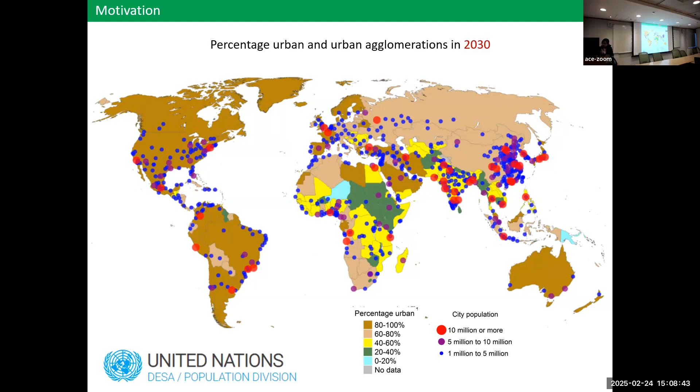During the rapid urbanization processes, there will be a lot of urban environmental problems. For instance, the urban heat island effect, meaning that the urban temperature is usually warmer than the rural temperature by several degrees. The second problem is air pollution, which usually occurs in cities with a lot of anthropogenic emissions, and also during rapid urbanization, the wind speed in cities has become lower, so the pollution removal ability has also been reduced in cities.

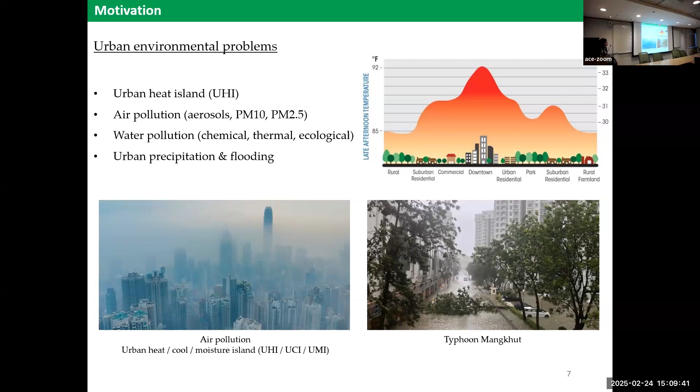The third problem is water pollution, and the fourth problem is urban precipitation and flooding, or we can also say the urban rainfall island, if you have ever heard about it. The urban rainfall island is sometimes initiated by the urban heat island, because the urban heat island makes the urban surface hotter, which gives the air more energy to initiate convective precipitation.

In contrast to rural areas, urban areas have unique characteristics. For instance, buildings tend to be denser and taller. Secondly, there is a lack of vegetation in cities. And thirdly, of course, there are more and more anthropogenic emissions of heat, moisture and carbon.

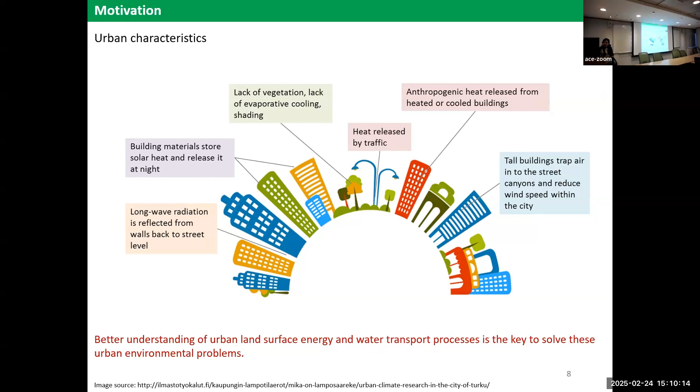So a better understanding of the urban land surface energy and water transport processes is the key to solving these urban environmental problems. Since the urban land surface is the lower boundary condition of the overlying atmosphere, any changes in the urban land surface will affect the overlying atmospheric dynamics and will further affect the local, regional, and even global climate. And since cities cluster a lot of population, that will enhance the vulnerability of urban residents to future global climate change and environmental changes.

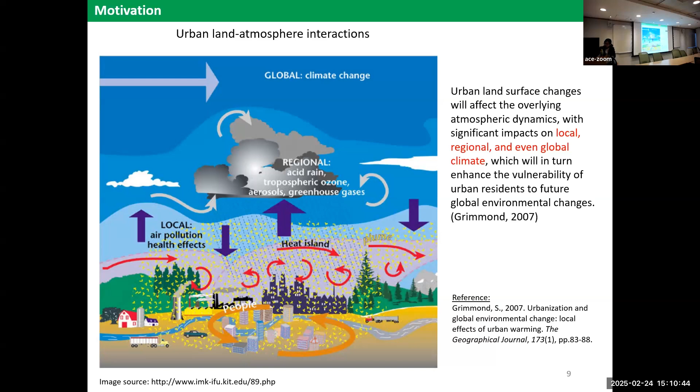To solve this problem, first of all, we need to know more about the physics. For the urban land atmosphere interactions, the governing equation is the urban surface energy balance equation, as you can see in the first line. The left-hand side is the available energy: Rn is the net radiation, HF is the anthropogenic flux, and the summation of these 2 terms is the available energy. The available energy will be partitioned into 3 terms: H, the sensible heat flux, LE, the latent heat flux, and G, the conductive heat flux.

To understand the urban surface energy and water transport processes better, we not only consider this governing equation, we need to consider more characteristics of urban areas, for instance, the urban geometry. In cities, we need to consider 3D geometry. So phase one is that our team has been doing continuous development of a model called the urban canopy model.

So phase one is just considering energy balance. The second phase considers both energy and water balance, so we consider vegetation, like grasses and trees, and also green roofs in our model. And in phase three, we consider the moisture sources with more accuracy. For instance, we will consider building emission of moisture.

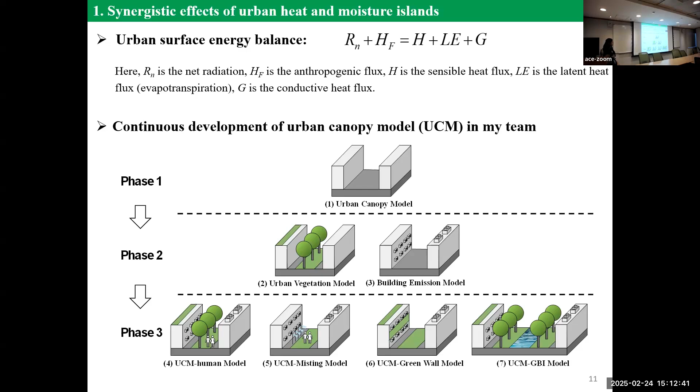And now let's take a look at an interesting phenomenon in Hong Kong. Everyone knows urban heat island. We know that temperatures have been rising, but how about moisture? How about humidity? Have you ever thought about whether urban moisture is decreasing or increasing? The answer to this question could be different for different cities. You may say that in cities there is less vegetation, so maybe drier. However, in Hong Kong, we witness a long-term increasing trend of urban moisture.

So these two figures, the left-hand side shows you the long-term trend of temperature, the right-hand side shows the long-term trend of moisture. The black line is the urban station, and the blue and red lines show the suburban and rural conditions. You can see that urban temperature is usually higher than rural, and urban absolute humidity is always higher than the rural areas. And this is actually the motivation for my first RGC fund.

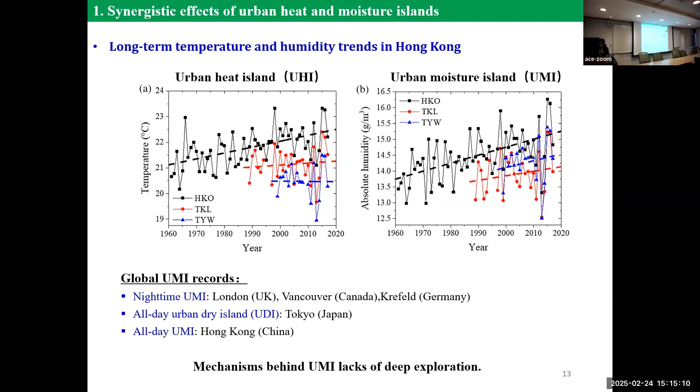So the global UMI records show that, for example, in London, Vancouver, and Krefeld, we witnessed nighttime UMI. In Tokyo, Japan, we witnessed an all-day dry island effect. However, in Hong Kong, we witnessed an all-day UMI effect. So we would like to know why. The mechanism behind UMI lacks deep exploration. And so we developed this UCM model trying to figure out the moisture mechanism behind it.

So this dynamic building-tree-air interaction has been considered in the latest phase of our UCM. First of all, we developed a new building emission model. Usually, when we are talking about building emission, most of us talk about the sensible heat or heat emission, but we don't mention moisture emission. So here we divide the emission into sensible and latent heat parts.

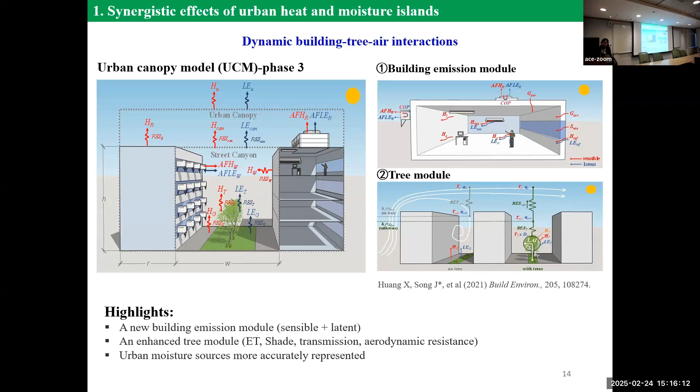And secondly, we introduce an enhanced tree module, so we can consider the evapotranspiration effect, shading effect, transmission effect, and aerodynamic resistance effect more realistically. By introducing these two new modules, this urban canopy model can resolve urban moisture with more accuracy. And this model has been tested at two stations in Hong Kong. The first one is SSP, Sham Shui Po, and the second one is HKO, the Hong Kong Observatory.

And in our comparison of model simulation against measurement, they show very good results, and the accuracy of H and LE has been improved by 40 to 60%, especially for the latent heat part, compared to other urban surface models.

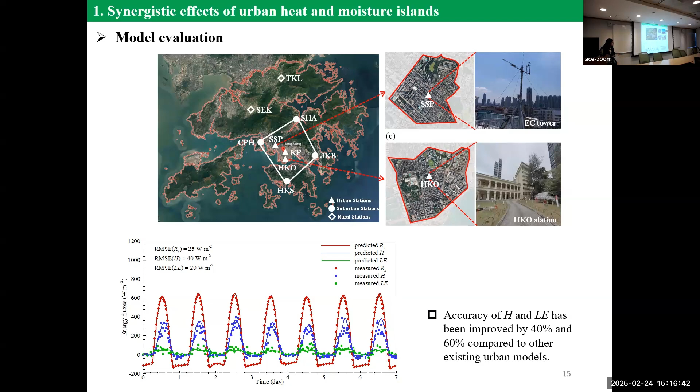And then after model evaluation, we conducted some model sensitivity analysis to explore the impact of the urban form, building emission, and also vegetation evapotranspiration on the urban heat island and urban moisture island intensity.

For instance, the first figure shows that most of the time, we can witness UHI above the axis. But sometimes, as with the red line, when the aspect ratio is equal to 8, which means that the building is really tall and the street is really narrow, in that case we can witness urban cool island, UCI. So this is also an interesting phenomenon.

And in the second panel in the first row, we can see that usually at nighttime, UMI occurs, and UDI will occur at daytime. The first row only shows the impact of urban form alone.

And if we consider more realistic factors, including building emission and vegetation evapotranspiration, like figures B1 and B2, you can see that both lines have been shifted above. And by considering building emission especially, all the aspect ratio cases have been moved to the UHI case. No urban cool island happens anymore.

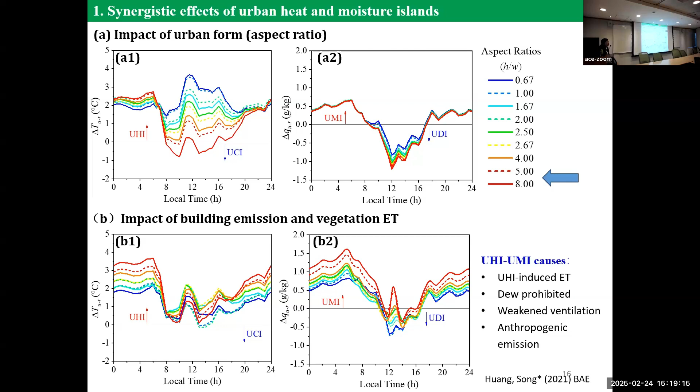And also, for example, in Hong Kong, we have more and more taller buildings. The ventilation has been weakened, so the wind speed in the city has been lower and lower. So that reduces the moisture removal ability. And so that is the mechanism.

And then we also apply a regional climate model to consider the fine resolution land use land cover data set. So we divide the urban land use land cover into different categories following the local climate zone standard. For instance, LCZ1 is a compact high-rise area. These areas around the Victoria Harbour, like these two sites, are considered more LCZ1, concentrated near the Victoria Harbour.

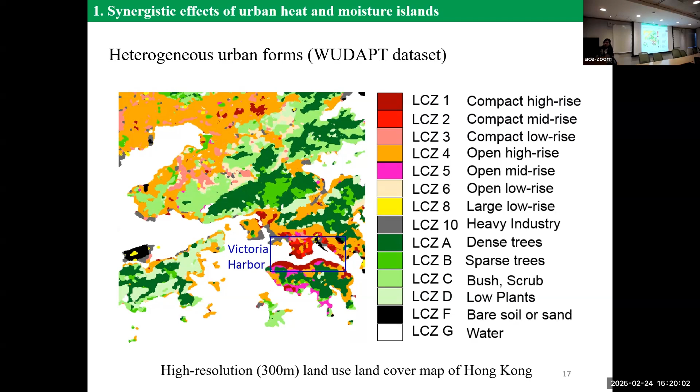So then we incorporate these fine resolution data into the Weather Research and Forecasting model, a regional climate model, to evaluate the spatial temporal variation of temperature and humidity. And specifically, by coupling into this regional climate model, we can assess the impact of topography. For instance, the left-hand side figure is just showing you the model settings. The right-hand side shows you the wind from south to north.

As you can see, the sea breeze can always bring a lot of moisture inside. And then if there are some mountains, we should also consider the mountain blocking effect. And that's a regional impact. For local impact, we need to consider the urban form. We use the aspect ratio to denote the urban form. So for LCZ1, compact high-rise areas, moisture cannot be easily removed.

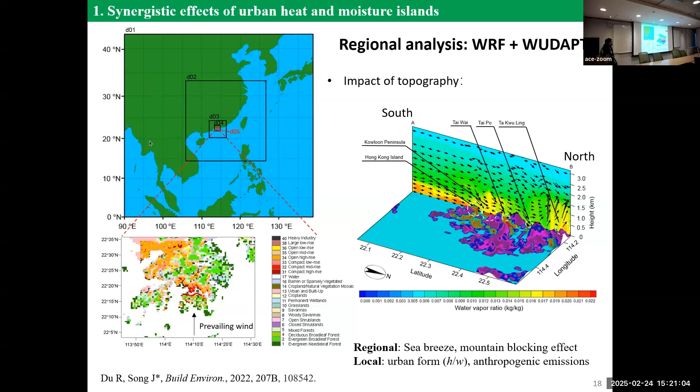So part one just showed you how we model temperature and humidity, how we model this hot, humid climate. In part two, we are trying to explore how this hot, humid climate affects human health. The information of this part is connected to my second GRF fund. So first of all, we developed the human environment adaptive thermal stress model, abbreviated as the HEATS model.

And in this model, first of all, we developed a new protective face mask model. Well, you may think that's very surprising. Why face masks? Because this funding was approved during the pandemic. So during the pandemic, I got a fund named development of face mask inclusive thermal stress prediction and warning system.

Because at that time I was working in Hong Kong, and I felt that when everyone wears masks, especially when working outside in the sunshine, because on Hong Kong Island we usually need to climb, we find that when we are climbing, we feel hotter. So the second innovation here is that it is one of the few models which consider topographical impact. So these two modules are quite new.

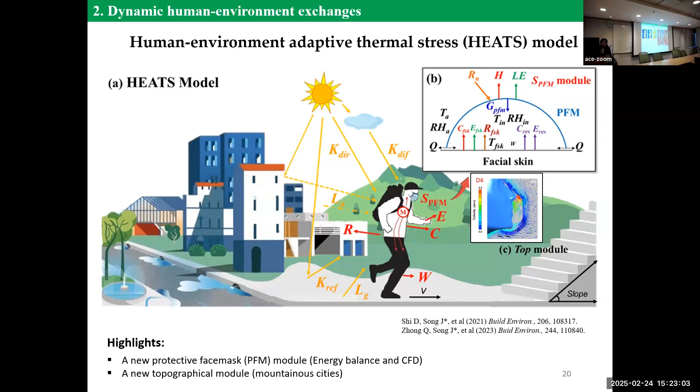And if you still remember, I introduced the urban canyon model, and then we coupled this human module into the urban canyon model. So this work is that we conduct a pioneering work by adding a human module into a UCM. Before our work, there was no one doing this, coupling a human module into the UCM. And then we consider realistic human-environment exchange in the street canyon.

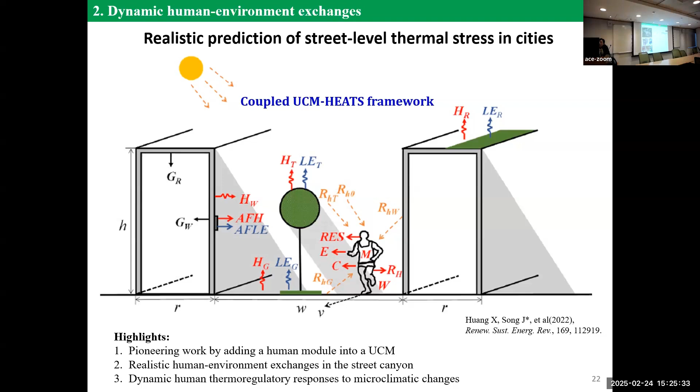So this UCM and its coupling model has been validated also in Hong Kong. In Tsim Sha Tsui, in a street, we conducted some field experiments, and then compared our model simulation with field measurements for air temperature and air humidity in the top row, and the skin temperature of the volunteers in the second row.

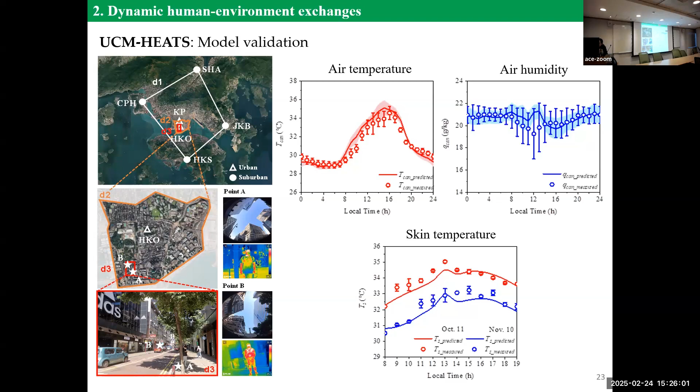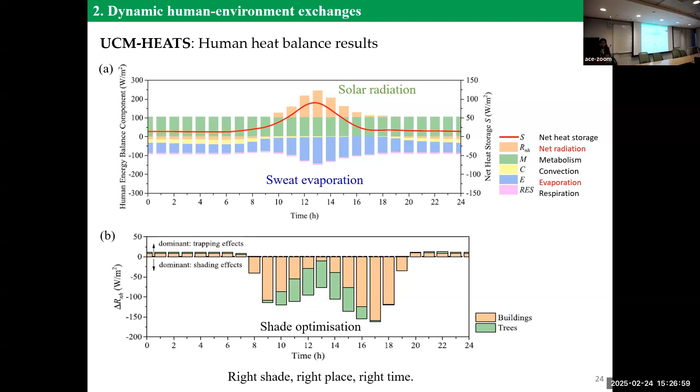And therefore, we further investigate the shade effect. When we talk about shade effect, we consider not only the shade effect of buildings, but also the shade effect of trees. And we propose this idea of shade optimization. So we propose right shade, right place and right time.

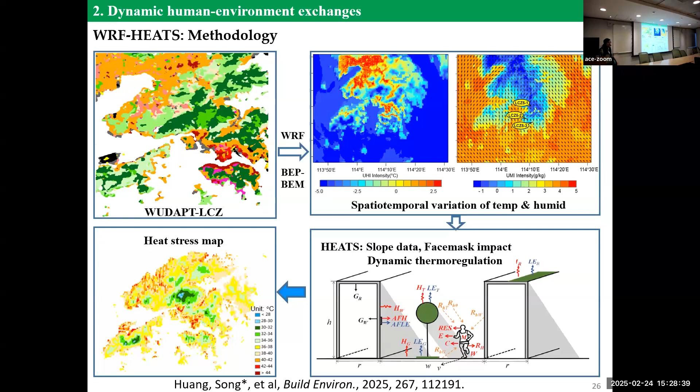We are also trying to couple this heat model with a regional climate model. So the procedure is like this. First of all, we incorporate the fine resolution urban land use land cover data into the regional climate model, and then we predict high resolution spatial temporal variation of temperature and humidity. And this spatial variation of temperature and humidity will be an input for the heat model. And then the further step is that we will predict the heat stress map for the whole city. So here is a heat stress map for the whole Hong Kong.

And we also collect some fine resolution data, such as the road network of Hong Kong, so that we can further predict the high resolution road map of heat stress, so that, for instance, we want to plan for our trip, right? If the starting point is A to B, we have several routes, and then we can do some route optimization to choose the most comfortable one by doing some calculations.

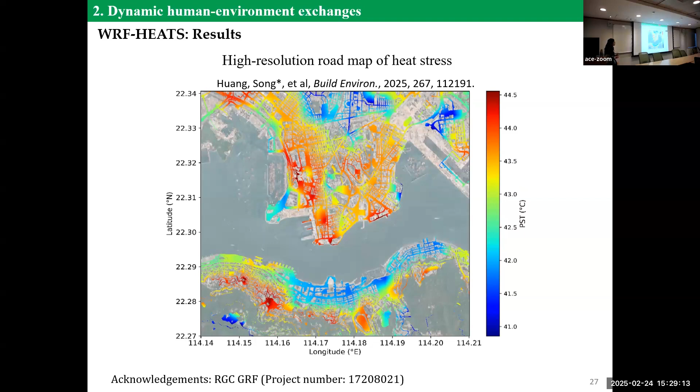So that's all for part 2. In part 3, I'm trying to discuss several solutions to the urban problems. The first of all is the nature-based solution, like the urban green-blue spaces. The first one is city greening optimization.

So if we consider a city moistening phenomenon, how do we think about that? Here is an interesting analogy provided by Professor Li at Hong Kong. When I discussed with Professor Li, he said that in his childhood, he always played in the field ground, like in a cornfield. In a cornfield, we usually feel very hot and humid, with stagnant wind.

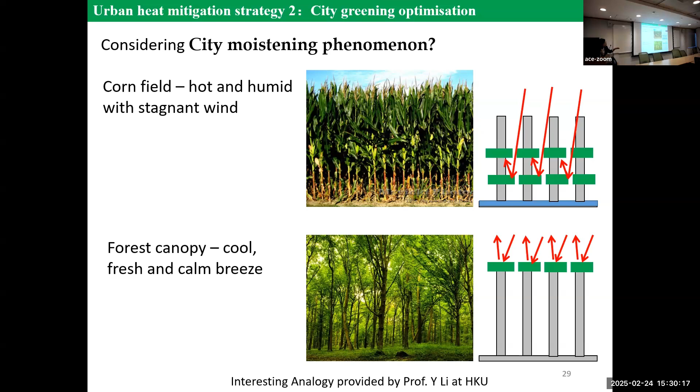And if we are in a forest canopy, it's usually cool and fresh, with a calm breeze. So when we are doing our city greening, the cornfield phenomenon is what we want to avoid, and the forest canopy is what we want to encourage. So that leads to our consideration: we don't want a cornfield city. Do we really want it? We don't want it, right?

The first figure on the right-hand side is a concept provided by, I think, the city of Beirut: the Beirut Wonder Forest. They want to do 100% city greening for the whole city, so it's a green city like that. Do you like a city like that? Maybe not. So we need to think about where to green, or in other words, to do the city greening optimization.

When we are thinking about city greening optimization, we can think about the tree types and also the scales of the green space. The objective is that we want good ventilation in the city, less trapping of solar heat, effective moisture removal, and we want to select the right trees. And in Hong Kong, we did some case studies.

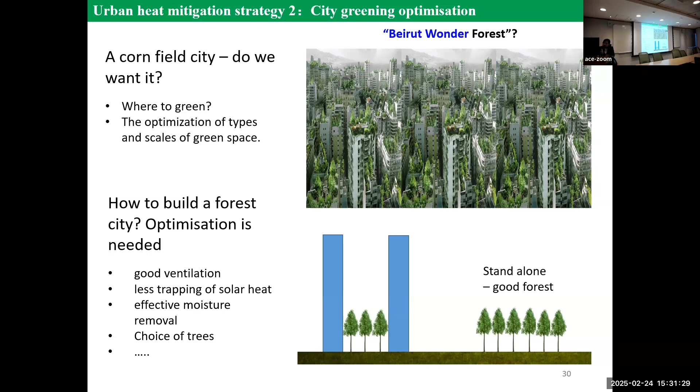The left-hand side shows you the 9 common tree species in Hong Kong, and we divided these tree species into 3 types according to their characteristics. Type 1 has large crown area and high crown height. Type 2 has small crown area and high crown height. And type 3 has small crown area and low crown height.

And we would like to ask 3 questions. For a given urban form, how do different tree species perform? Question 2 is, for a given tree species, how does it perform in different urban forms? And these 2 questions lead to question 3: how to select optimal tree species for different urban forms.

Our preliminary results show us that, for instance, for a street canyon with low aspect ratios, we might need to select tall trees with large crown area. And for street canyons with high aspect ratio, the optimal tree could be tall trees with small crown area. So these are some preliminary studies. Of course, we can consider more characteristics of trees.

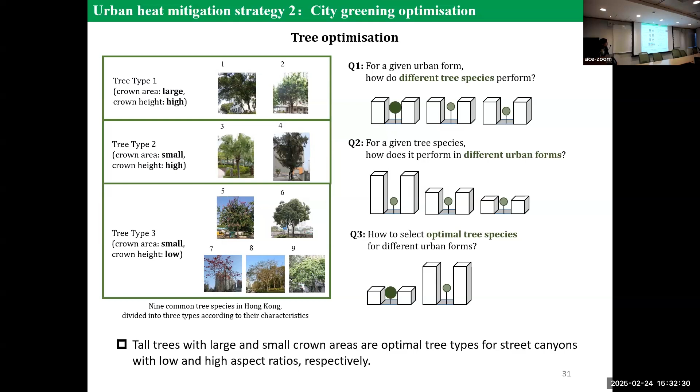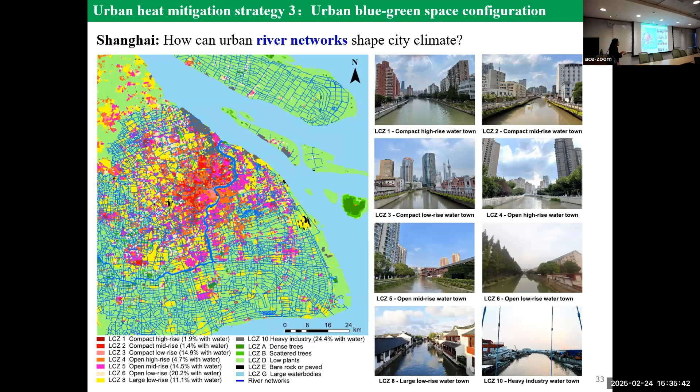In this study, we do a multi-source data fusion. We integrate remote sensing data and also fixed and mobile monitoring. We conducted a month-long field experiment in Shanghai. The wide river is the Huangpu River - it's kind of like the mother river of Shanghai - and the narrower river is called Suzhou Creek, which is kind of like the grandmother river of Shanghai. Our study area is just in the core center.

Our results are briefly summarized below. We find that urban rivers can be cool sources and wind corridors. Secondly, trees compared to rivers are usually fixed, and the position cannot be moved, but rivers can flow and carry cool water from upstream.

For instance, if the river is coming from a rural source or rural area, then the water might be cooler. And if a river is passing by an urban park, for instance below a tree canopy, then the water can also be cooler. This river flowing characteristic can also bring some cooling effect downstream.

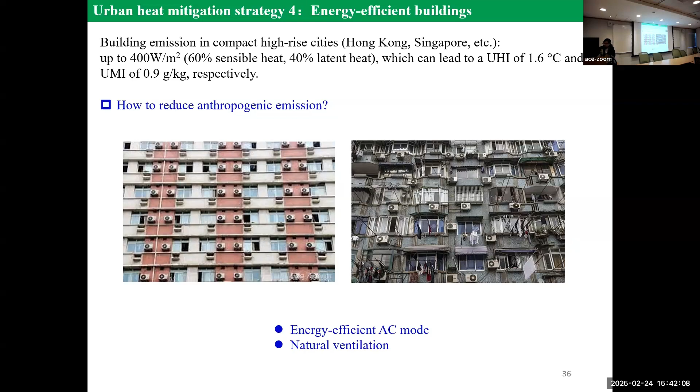This reminds me of two projects I participated in at Cambridge. The first one is called MAGIC, meaning Managing Air for Green Inner Cities. The second one is called LoHCool, meaning Low Carbon Heating and Cooling of Cities.

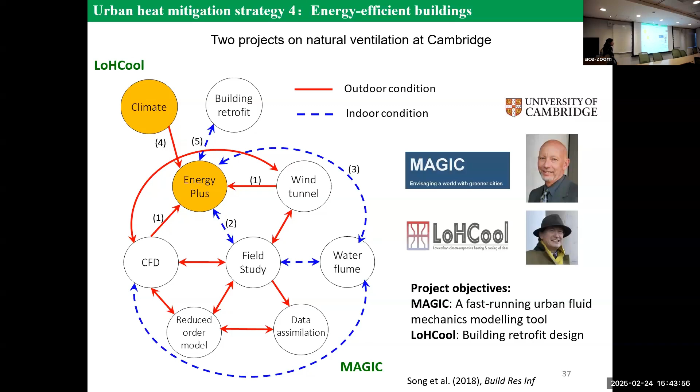The objective of the MAGIC project is to develop a fast-running urban fluid mechanics modeling tool, with the study area being London. The objective of the LoHCool project is to calculate the impact of natural ventilation on building energy. Finally, we would like to propose some building retrofit design.

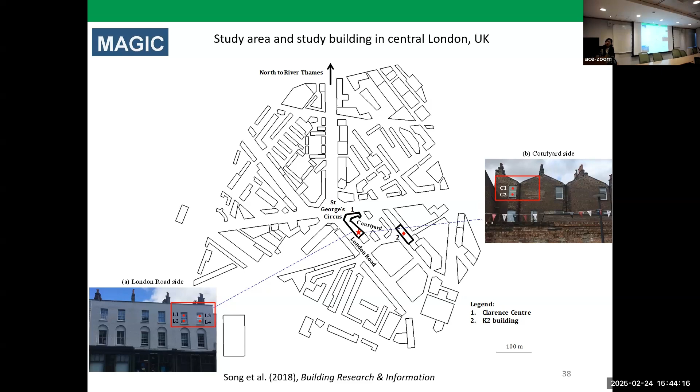Here I'll show some figures and study areas about these two projects. For the MAGIC project, the study area is in central London, and we also select a study building in the center of this study area. We built a lot of building blocks and conducted wind tunnel experiments at the University of Surrey wind tunnel.

I think it's a very famous tunnel in the UK. We measured a lot of stuff, specifically the pressure coefficient for different wind angles.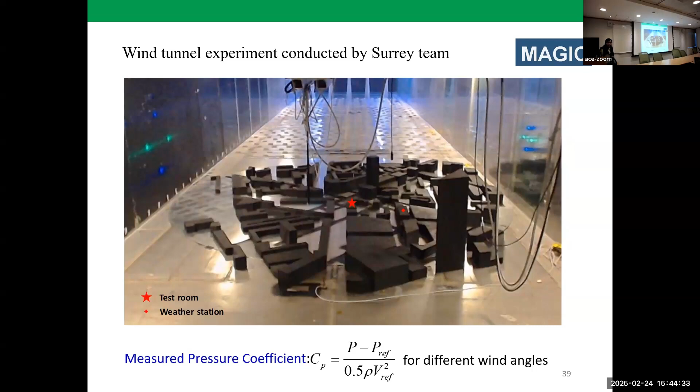We incorporated this information, integrating it into the building energy simulation, the EnergyPlus model. By coupling the wind tunnel and EnergyPlus model, we improved the model simulation of indoor temperature and humidity.

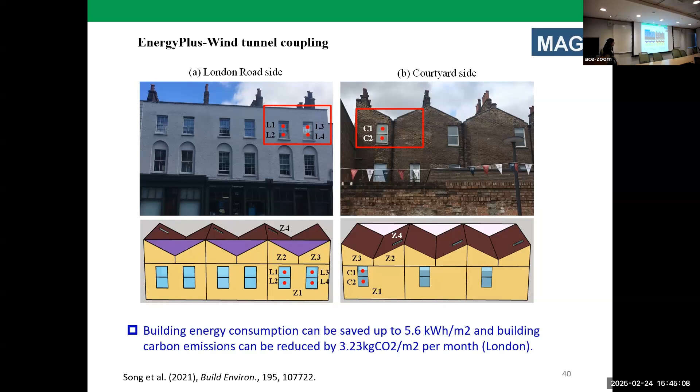So the building energy consumption can be saved up to 5.6 kilowatt hours per square meter, and building carbon emissions can be reduced by 3.23 kilogram carbon dioxide per square meter per month. This result is for London.

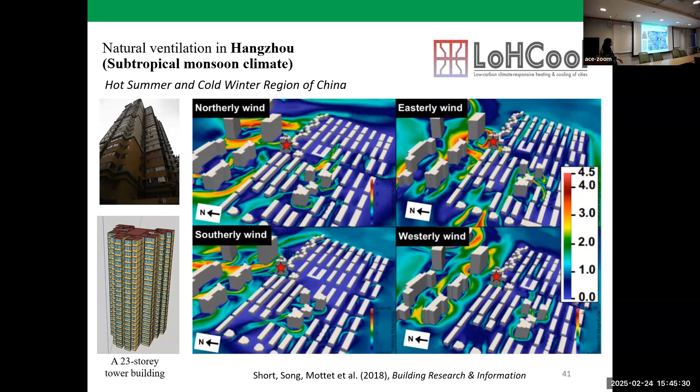For the LoHCool project, we conducted natural ventilation studies in Hangzhou, a subtropical and monsoon climate. First we assessed the wind effect from different directions, like north wind, easterly wind, south wind, and westerly wind.

We found that on the east facade, the probability to introduce fresh air is highest. So we're trying to do some building retrofit design based on our CFD simulation results, proposed by Professor Alan Short at Cambridge.

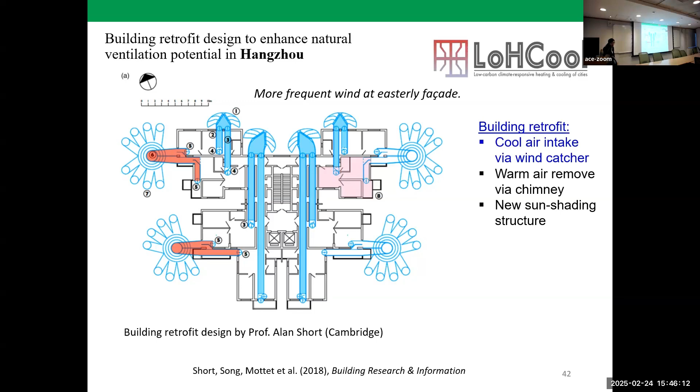He proposed cool air intake via a wind catcher in the east facade, and also proposed some chimney design so that warm air can be removed via the chimney, along with a new sun shading structure. That is shown in the next page, with the design structure on the right-hand side.

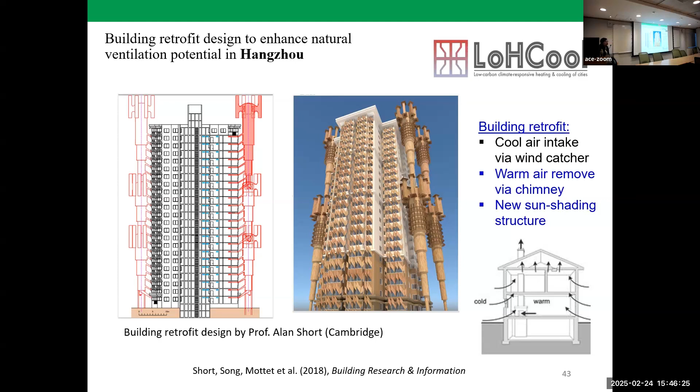So, incorporating wind catchers, the chimney, and a new sun shading structure — that's the summary of my talk today.

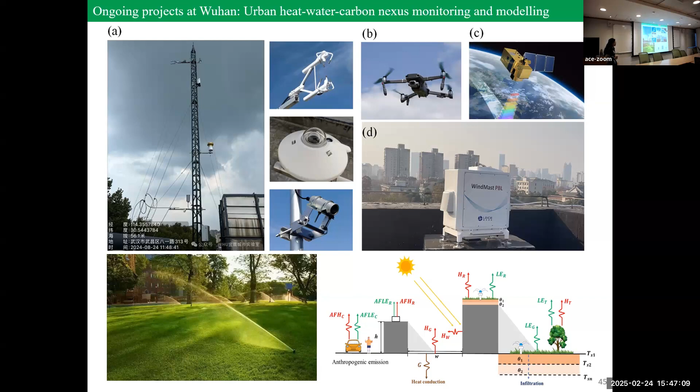My ongoing project is in Wuhan. Since I'm supported by the National Excellent Young Scientist Fund, I got a lot of money to buy equipment. First, I purchased an eddy covariance tower, some wind lidar, and drones. We also want to establish a meteorological monitoring system over green roofs — in short, a sky-to-ground monitoring system in Wuhan.

Based on a dense urban observation network — in 2022, a few years ago, the Wuhan Meteorological Bureau set up a dense urban observation network. Before 2022, we only had 5 national-scale weather stations in Wuhan. After 2022, we have 180 urban weather stations, giving us a dense urban observation network.

You may think, with so much big data, of course machine learning appears, and of course we will apply that. We also want to do high resolution regional climate modeling, and integrate physical simulations with deep learning. We'd like to assess unique phenomena like a city with hundreds of lakes, do wind corridor analysis, and study how urban blue-green strategies can help mitigate the urban heat and moisture island effect in Wuhan.

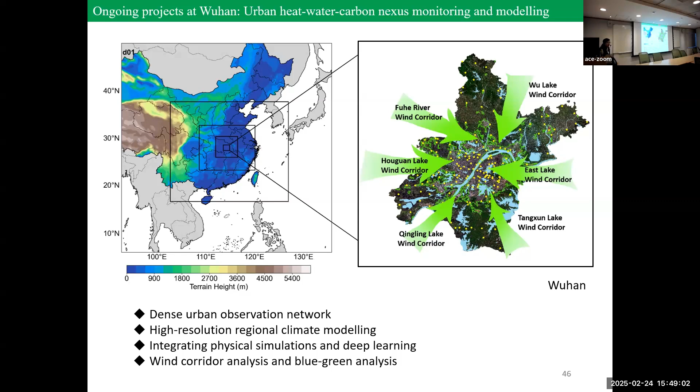Specifically, the objective of the Yangtze River simulator is to provide a tool for more accurate urban flood forecasting by integrating meteorological information, remote sensing, monitoring data, and more. This is a very big project integrating many teams. The final objective is to maintain water security — meaning maintaining water quantity to mitigate urban flooding, water quality to keep our water clean, and water ecology to support a low carbon Yangtze River and low carbon cities along it.

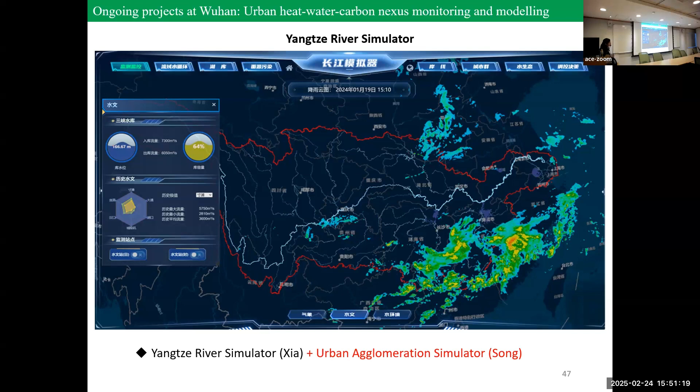At Wuhan University, I'm part of the big team led by a senior professor called Professor Xia Jun, whose representative work is the Yangtze River simulator. My collaboration with him involves enhancing the urban module, especially the urban agglomeration module, within the Yangtze River simulator, so we can have more accurate urban predictions based on its big framework, supporting the green development of urban agglomerations along the Yangtze River.